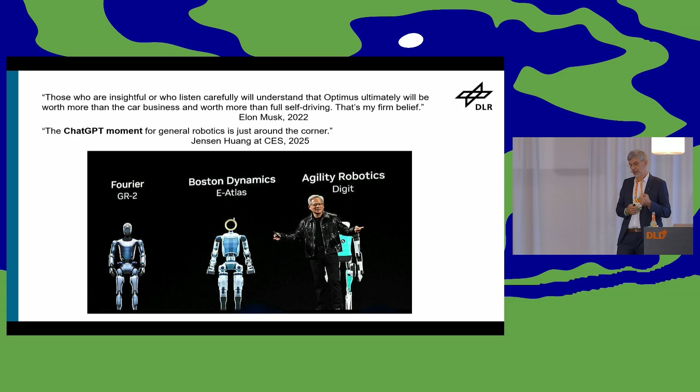Now, if you want this AI to go out in the real world, of course, we have autonomous driving, but if you want to do things a human can do, then you need even another leap step in robotics.

And there are plenty of companies coming up, and of course you might trust or not trust those studies, but there are crazy numbers around, which make investors and industry nervous, like saying in 2-3 years we will have manufacturing, then business, then family.

So everyone, instead of buying a second car, will buy a humanoid for at home, and then the numbers here are tremendous. These are thousands, so no, 10,000 units, huge numbers.

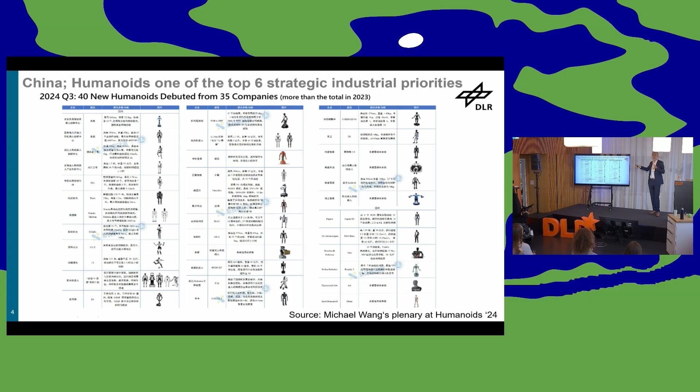And then also, after this start in the US, China responded with a huge program. They put, according to Süddeutsche Zeitung, about 140 billion into just humanoid robotics, with the consequence that you have more than 140 companies building humanoid robots with no application out there yet where they act in the factories.

So the question is, what about us? How do we respond in Europe? What do we do about it?

And one place where we are discussing those things is a network of excellence in robotics, which I have the honor to coordinate, and where we have all the major research centers, or most of the major research centers in Europe, which are strong in robotics.

And the question is, how can we respond with a good scientific excellence, maybe quite fragmented industrial landscape, to this challenge? And the main topic we wanted to focus on was transferability, because looking at my colleagues, for example, Tamim Asfour in Karlsruhe, or colleagues at TUM.

We all have our humanoid robots on wheels, on legs, maybe other types of mobile robots, and we all focus on the same things: perception, human-robot interaction, motion planning, skillful motion, and so on, and we repeat and reinvent the wheel again and again. So we said, what about if we can use the AI tools and the advancements in robotics...

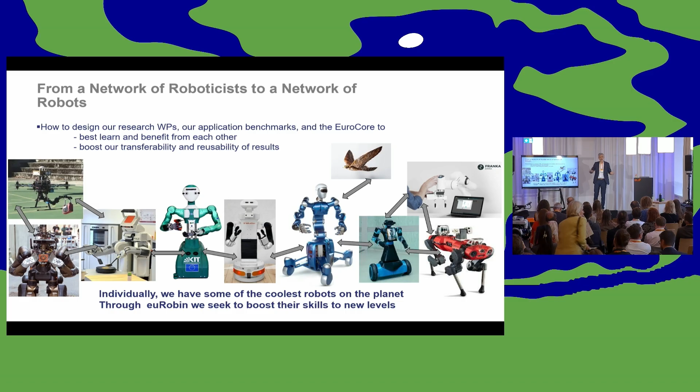...such that if our Justin learns a skill, for example, to unload your dishwasher, you can upload it in the cloud, and the next day another robot can do the same thing, even though it has a different morphology, not even humanoid, but maybe on a Segway, or just having one arm. So this is what we are looking at.

Somebody talked about hackathons just before lunch. This is what we are doing. At least once a year, we get together with 200 people, put 30 robots together, and try to solve things in competitions, but what we call cooperative competitions.

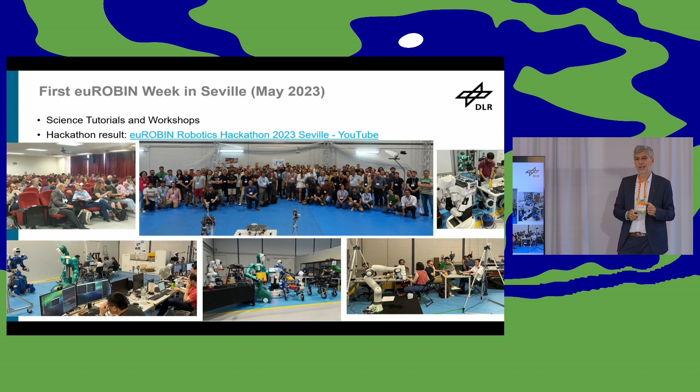So you earn points if you solve a task. You earn 10 times as many points if you solve a task using software modules from somebody else, just to foster standardization, integration, and so on.

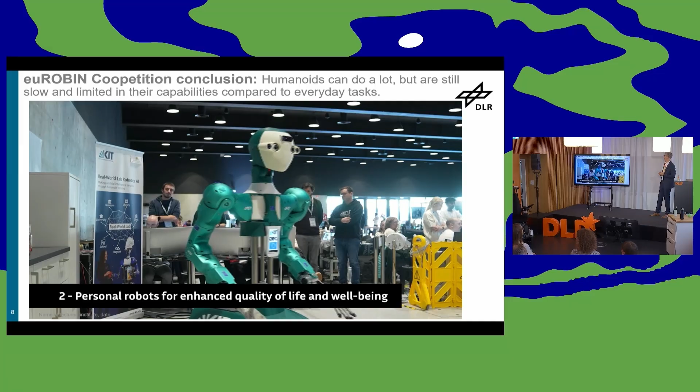And here are some images from the coopetition we had in Nancy after the Humanoids conference. And this was our Justin robot. This is KIT from Karlsruhe. We had one league for home robotics, so unloading the dishwasher, going and bringing things to the fridge, interacting with humans.

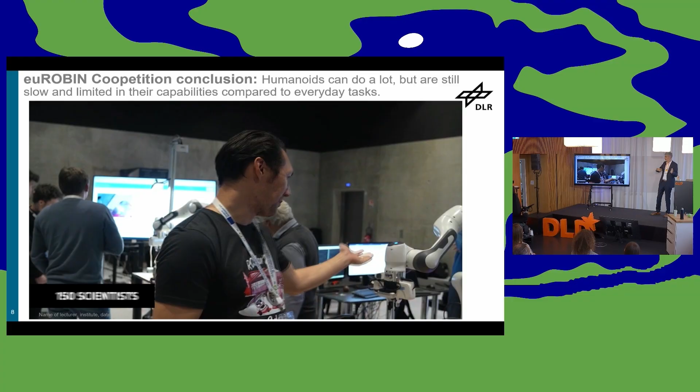Then we had the industrial part with a task board coordinated by our colleagues at TUM, where you have a standardized benchmark with Internet of Things devices.

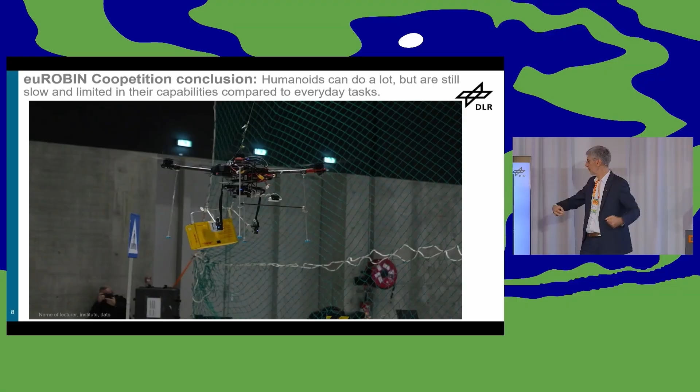These are the colleagues from ETH Zurich. They have a quadruped with wheels, so it doesn't need to be humanoid. Here you have a drone which has arms, and they had a scenario of last mile delivery.

And here you have a centaur, legs and wheels and 2 arms, and they are bringing the parcel to your home. So these were the 3 tasks: home environment from INRIA France, industrial, and last mile delivery.

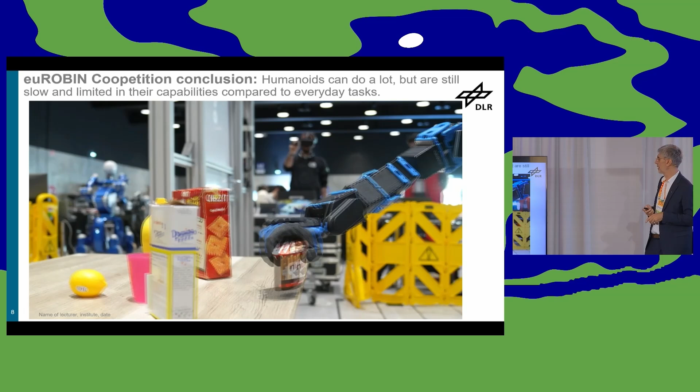This is a group from Italy, which had a telemanipulated robot. So it was big fun, and we also saw the chances, but also limitations of robotics.

Now, I will try to go through some aspects, to say what are the challenges and where are we.

Building humanoid robots, Japanese were among the first. This Ashimo in 2000 was the first to be recognized by the public. There were developments in the 90s as well. Now we have plenty of them.

And of course, there's the question, what kind of actuators? How can you do it more efficient, faster? There's big development also in actuation, in power electronics, also with electric motors for electric cars, for wind turbines, for so many new applications. So there's a shift in power density of actuation.

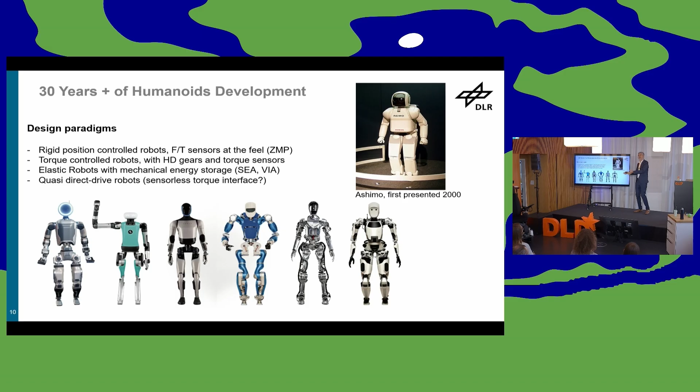Building such systems, there's still a competition: how does the ideal humanoid look like? Just to answer your question, no, you don't need wheels all the time. If your factory is flat, you don't need legs, right? You can use wheels. But the point is, if a newspaper wants to speak about AI, they would put such a robot on their cover, because everyone is then sure this robot is intelligent, just because it looks like a human. While if you put a centaur, you don't know exactly how smart a centaur is.

So something has also to do with communication, and with the fact that it's easier to get investment for a humanoid than for a robot with 8 legs and 7 arms, for example.

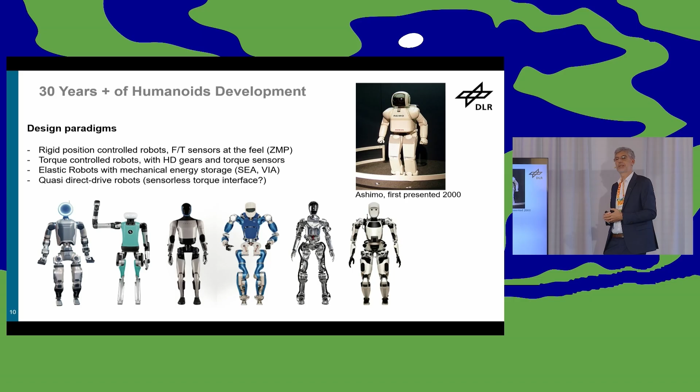But it's also related to the fact that our homes are all designed for us, for our hands, for our bodies. So if you have robots to do whatever you do at home, probably it needs to look a little bit similar, to climb your stairs, to grasp all the objects which you have in your home. So it's not the ideal solution, but it's something which is good in human environments.

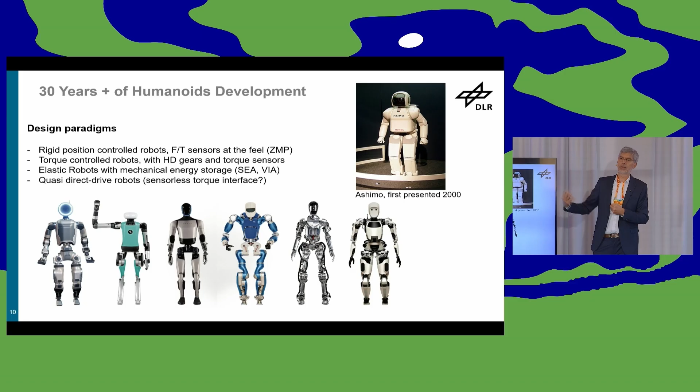And interpretability is another aspect. If you watch a humanoid moving in a human kind of way, you kind of have an expectation and a prediction what it could do. The technology has been around for a long time. And when people talk about having them in homes in 2-3 years, I'm a bit skeptical about that, just because I did my whole career developing cobots.

And we had a first prototype after about 8 years, in 2003, and then we licensed it to KUKA, then Franka, Emika, Agile Robot - a lot of companies bring those robots to the market. But from the start of the development, from the first working prototype in 2003, it was like 8 to 9 years until the first companies had the products.

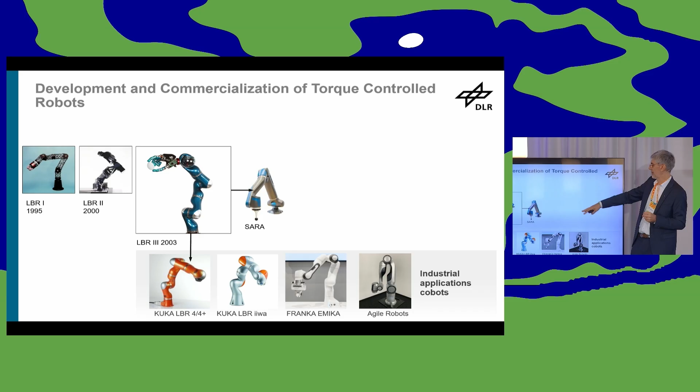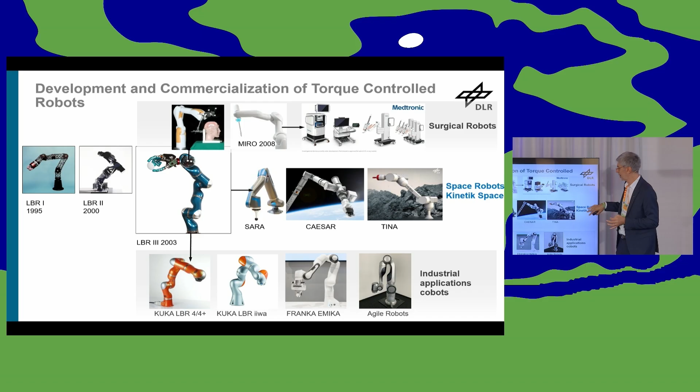We licensed this to Medtronic, to surgical robotics - we heard about that. So a big industry emerging, but it's deep tech, and it takes 10, 15 years at least. And now we are doing it also for space - space is even slower. But then you can use the actuators and build humanoids like Toro, Justin.

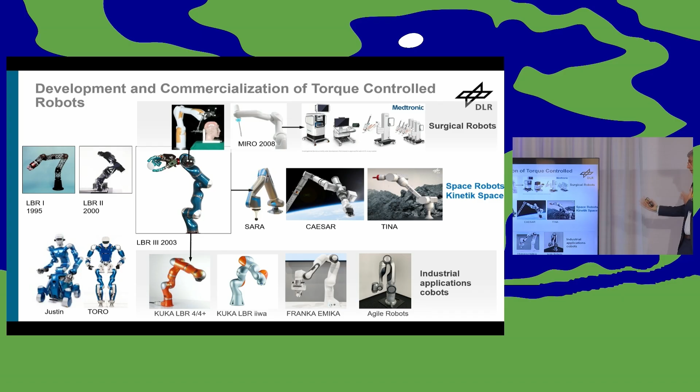And of course, now things change. We never had that amount of investment, of talent in robotics. Companies had maybe a few thousand employees. Now the big tech companies go into the game. So maybe this will also accelerate the entire development.

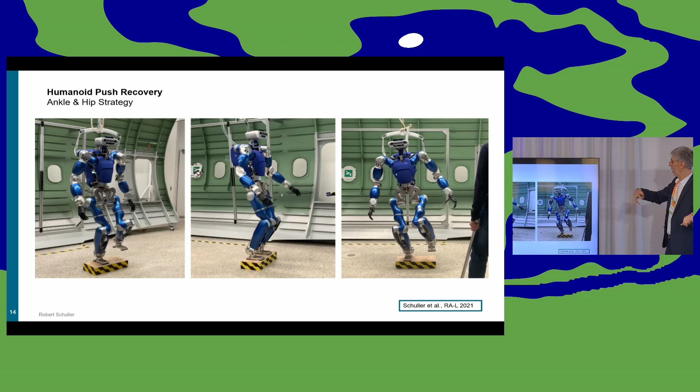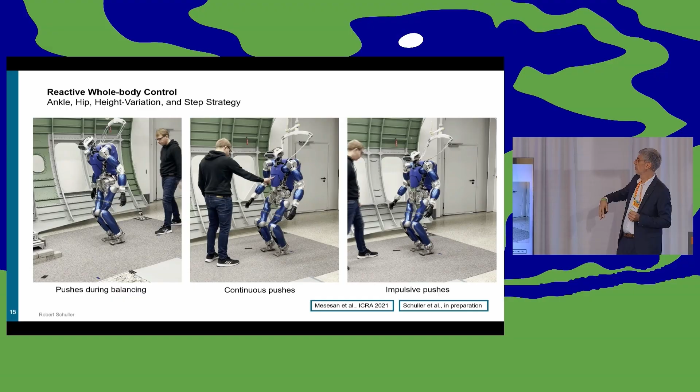When you see those videos, you see walking, balancing, doing some acrobatics. This is still, I think, to a large extent solved. So robots can react in a pretty human-like way, either by machine learning or by other model-based controllers. We have also robots which can interact with humans, which are safe for interacting with humans, although they have pretty high power density. So I think these things are well solved.

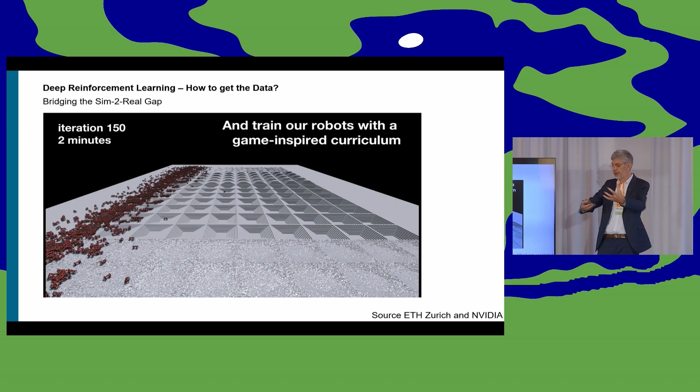And the big game changer in the last years came from ETH Zurich, NVIDIA, where you train massively in simulation with GPUs in parallel. Because the point is, in contrast to speech translation, to language recognition, we don't have the physical data in the internet. You have a lot of labeled text in the internet to train your large language models, but how do you get the physical motions, the connection between the camera input and the motion of the robot? You don't have those data on the internet.

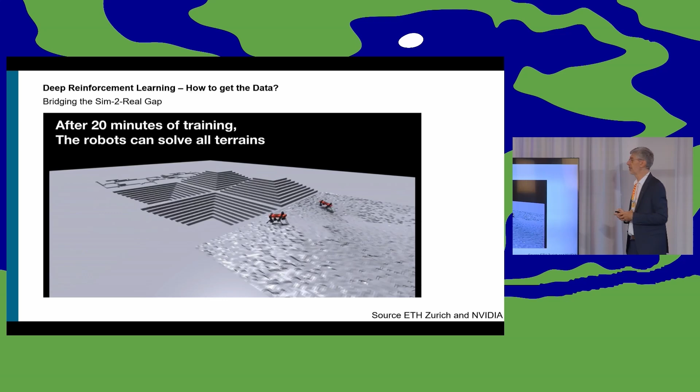So you could do simulation like this, but there's still what is called the sim-to-real gap, which is still not a completely solved challenge. Does your simulation match well enough the reality? It works sometimes not so well. But this is where we are, and most of the fancy videos you see also from Japanese or Chinese robots are made using this kind of reinforcement learning tools from NVIDIA.

But then what came additionally to hardware and control are the entire developments of AI in its different kinds, right?

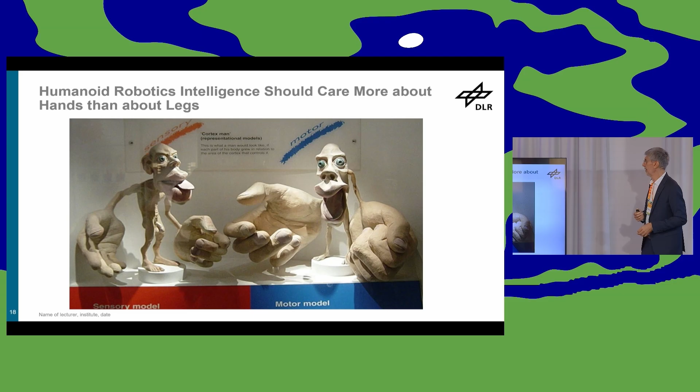When people talk about humanoids, many focus on the legs, but many forget that hands are even more important. This homunculus is just an illustration of the proportion of the brain used for different body parts, scaled up if a big part of your brain is addressing those parts, for sensors and actuation. What you see is that most of your brain deals with the hands, both for perception and action, then with the lips, with speech and so on. Feet and legs are not even that great, which shows that manipulation, handling all those objects, is still a largely unsolved task in robotics, and we are just getting better and better on that aspect.

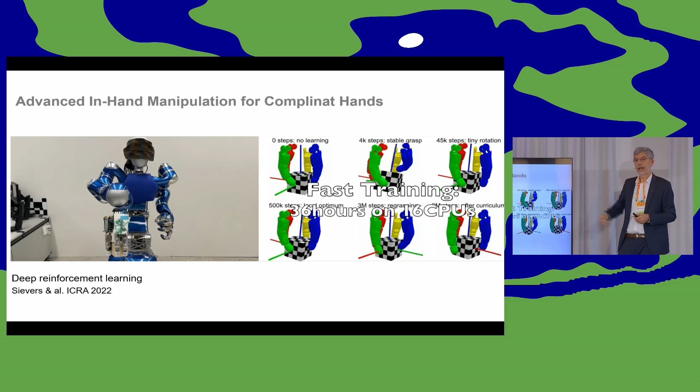And again, here you can use reinforcement learning, sim to real. Even manipulating a cube or grasping different objects needs millions of training cycles in simulation. And then you can manipulate certain objects. So there's continuous progress. When are we there that you can manipulate all your objects in your home? I don't know yet.

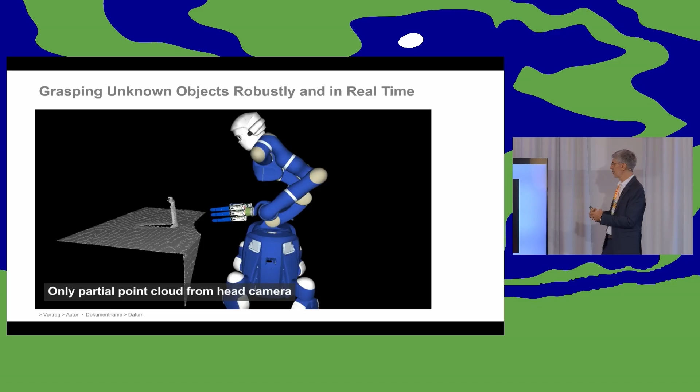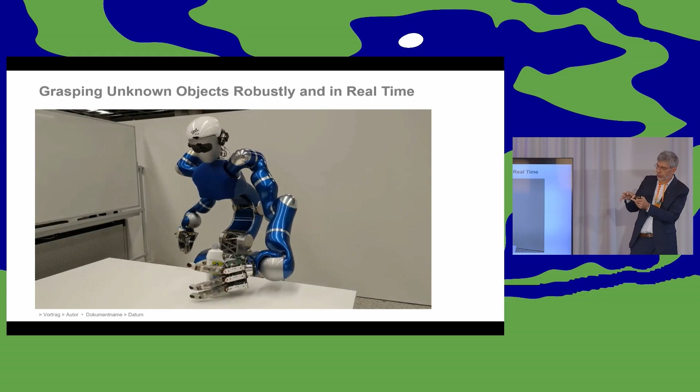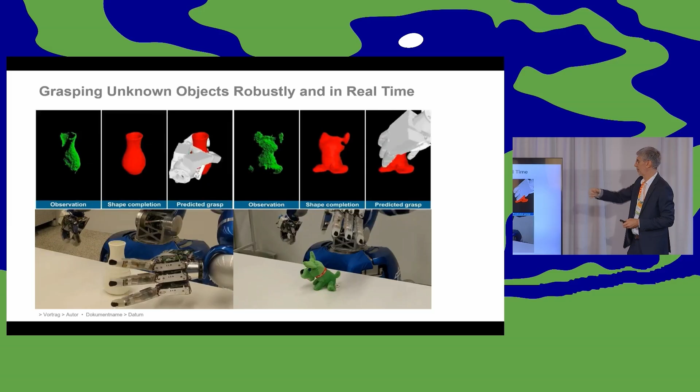The other aspect, some example of the challenges we have and where you use AI: you have a camera, and you recognize, of course, only the front of the object. As a human, you know how the object most likely looks behind. So you have an AI part which does the shape completion and then generates the grasp, telling you where to put each finger, how to bend each joint, such that you grasp the object. And then you can put arbitrary objects on the table, and within 1 second, this AI pipeline generates a grasp such that you can pick objects.

How to train vision: meanwhile, we have simulation tools where you can generate synthetic visual data to train your vision algorithms. So data generation is one of the big challenges.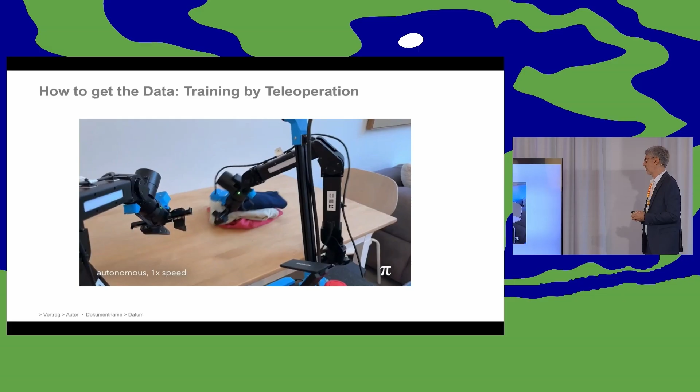This is an example of a company from California coming out of Stanford, and they are folding laundry. It's an impressive demonstration. Mainly, they do teleoperations, so they have lots of people. Also, many other companies use hundreds of people to teleoperate robots, and they record that data, then use it for training. So data are still very, very expensive, and I think solving that, there are still unsolved methodical issues in order to scale really at large.

Some are very optimistic and say in 2 years it will be solved. Some say it will take longer.

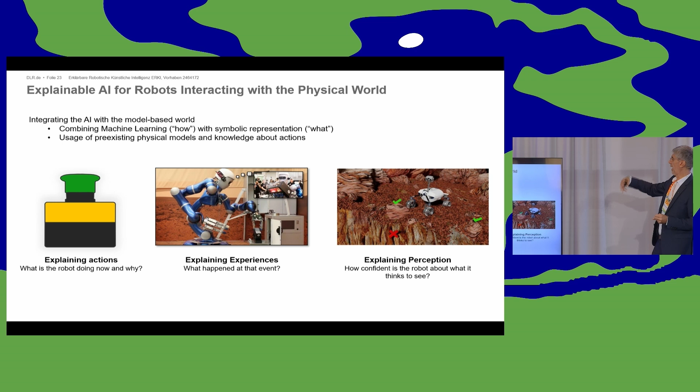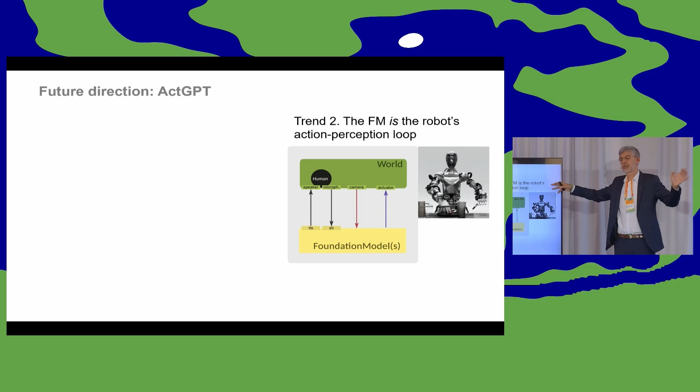Now we have foundation models which help in explainability, in planning, in several aspects. There's a big discussion going around about whether you will have one big foundation model where you put the camera input data of your robot, and the foundation model gives you motions for each of the 40 joints, or whether it's rather like in your brain, where you have a cognitive architecture for perception, for planning, for cognition, and so on. So research is going on. Humans, it's in our brain, it's not an amorphic structure, but we know where perception is, where the world model is, where planning is, where reasoning is, and so on.

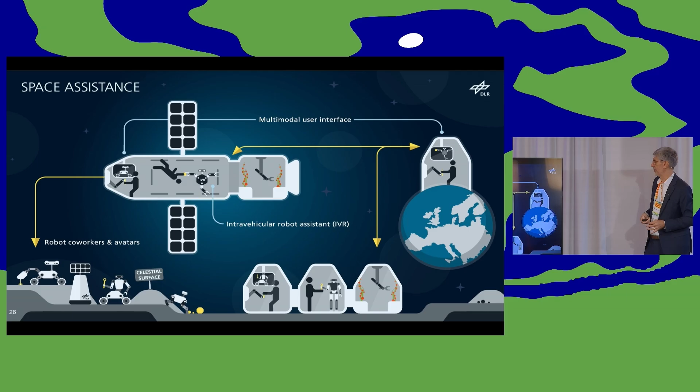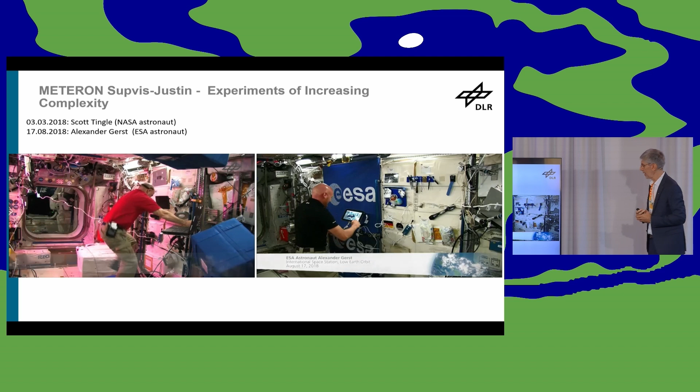Okay, now some applications. I'm from the German Aerospace Center, so we are developing robots to go to foreign planets and have done experiments with astronauts over several years to train them and to learn how they would operate robots on a planet. Imagine this is Alexander Gerst, and the other one is a NASA astronaut, and they are operating several robots in our institute.

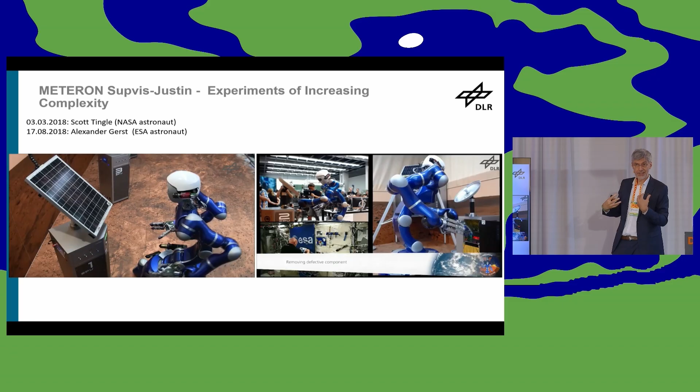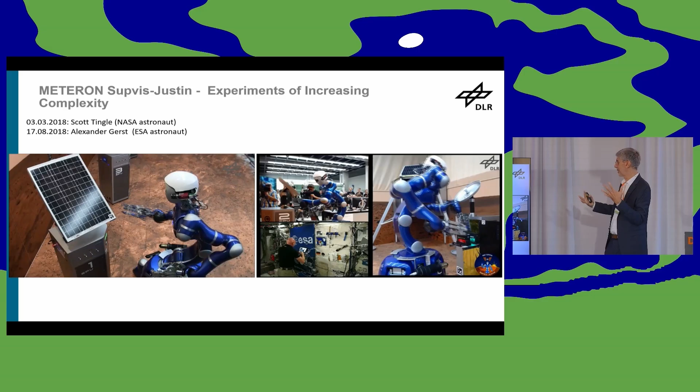They look through the eyes of the robot, can also go and operate them as avatars and feel the forces when they interact with the environment, but they can also use AI skills and just tell the robot to go and pick, I don't know, this electronic box. And they face challenges like smoke coming out, and they need to replace something from the electronic cabinet and so on.

The goal is at the end to have a humanoid on Moon and on Mars. We know Elon Musk wants to have one. We still hope in Europe to maybe bring the first humanoid or legged robot to the Moon. There's a big discussion going on. The decision will be made in November by the European Space Agency.

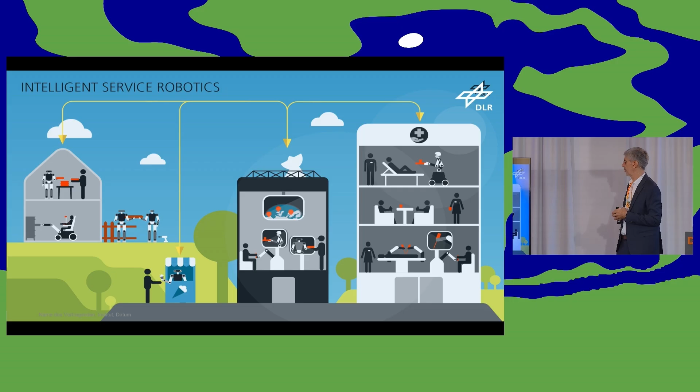And then the topic which makes also the connection to the next talk is humanoids in everyday life, addressing the challenge of demographic change, both in hospitals, in homes, in public spaces, and so on. I mean, this kind of plots probably all of you know.

Those people will retire in the next 15 years, and other people will come into the workforce. In Germany, it's a delta of 4 to 5 million. In Europe, it's 20 million in 10 years that we will lose from the working market.

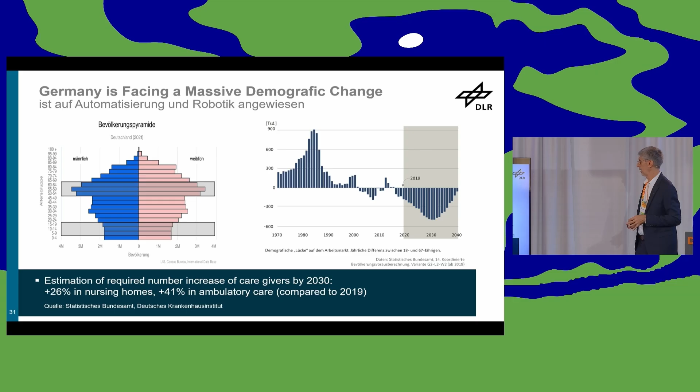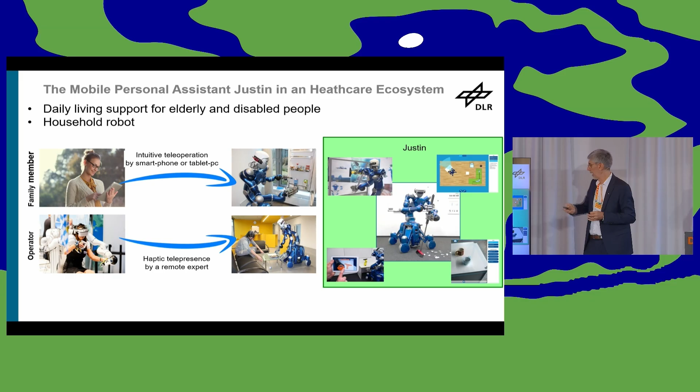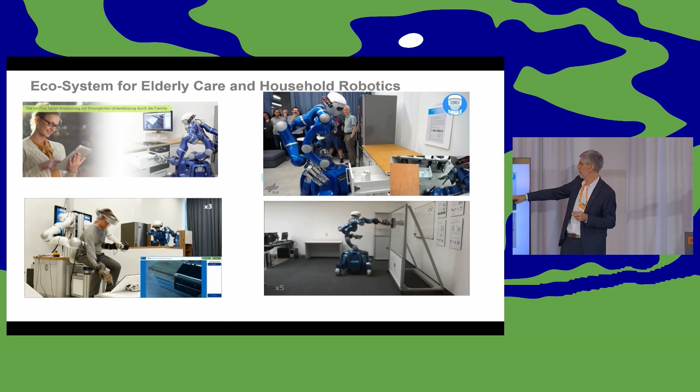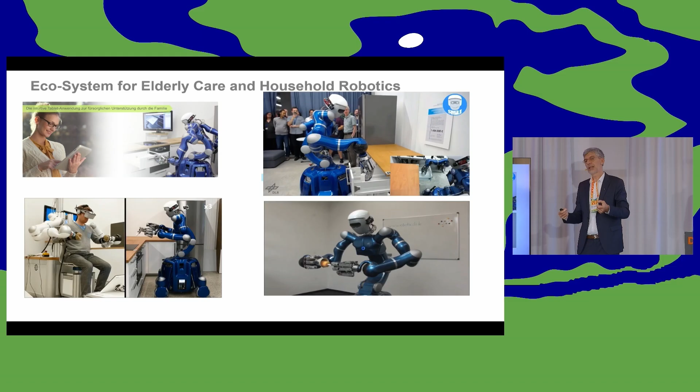So having robots to help people stay longer at home, not needing care, but being independent, either as humanoids—actually they don't need to be always humanoids. And of course, humanoids you can operate, but AI is not good enough yet that they would do the job independently. What we do is we have a call center with somebody who can log in as a teleoperator, and if some problems occur, they can teleoperate the robot. Then you can record those data, and based on those data, you can improve the skills of the robot. That's how the market will scale and grow, right?

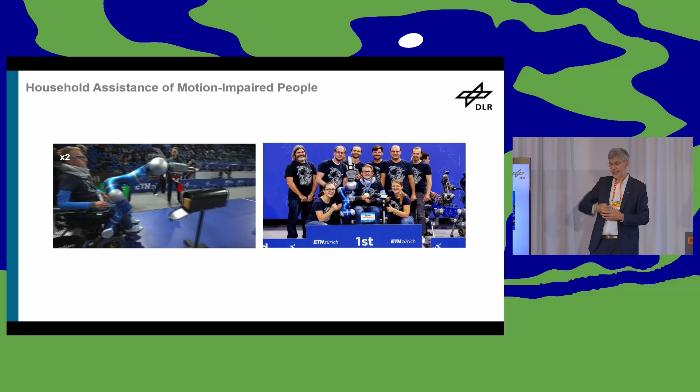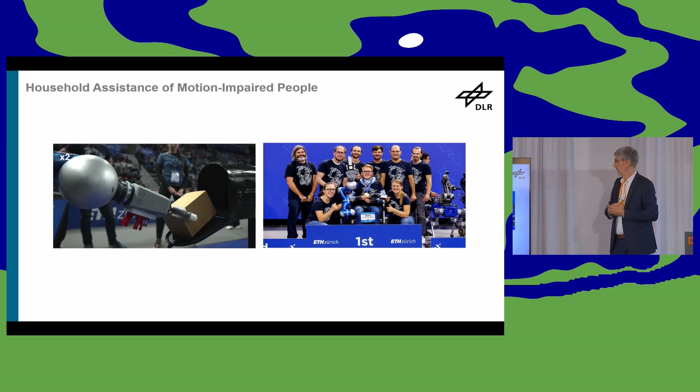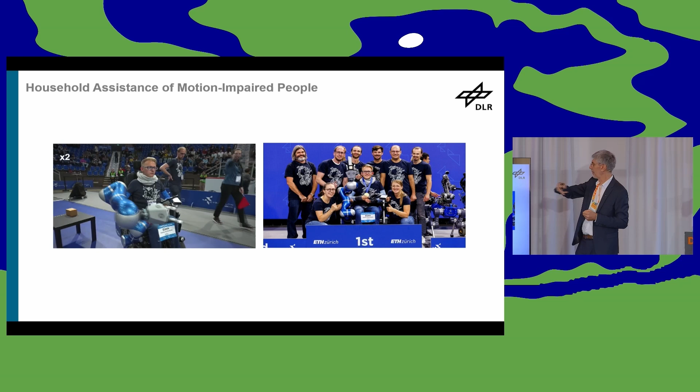But it's not just the humanoid helping—and this is Annette Hagengruber and Jörn Vogel who will present our robot—you have also things like a robot on a wheelchair helping locked-in patients like Stephen Hawking, for example, with AI skills. This is our team participating in a competition at ETH Zurich, a kind of Olympic Games for people with disabilities. We got the first prize there, and this motivated our team to start up a company based on that. And this is only possible because people are fully in the driving seat—they decide what the robot should do, but AI helps them accomplish the tasks. This can be in home, in hospitals, and so on, with a call center.

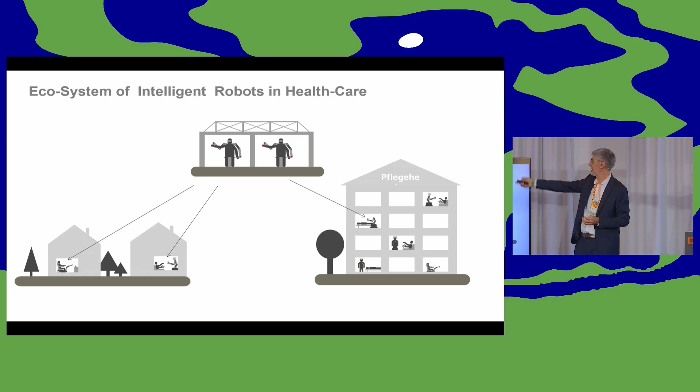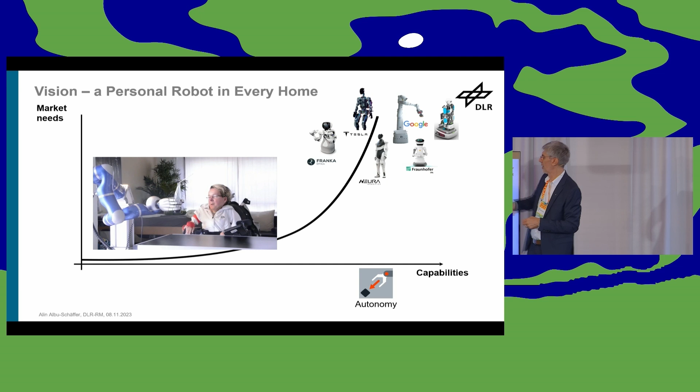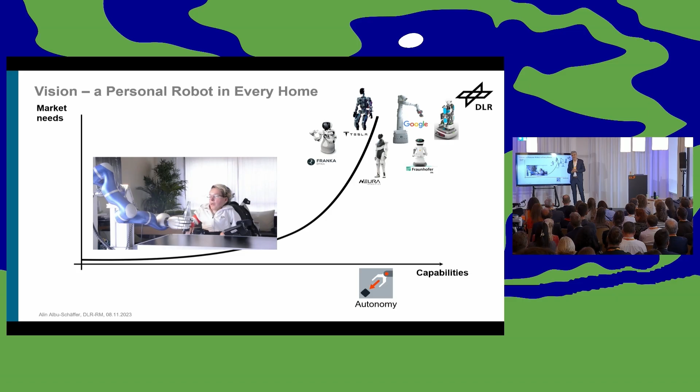So the big question is, I know very well how to address the market for 100 million robots, but how do you sell your first 1,000 robots, right? It's difficult to enter this exponential curve and scaling. That's why we think maybe not the perfect humanoid, which is maybe 10, 15 years away, but some more simple and easier to achieve goals can be the solution, where you start more with teleoperation, start generating data, and based on those data, you improve your quality of the AI and improve your services up to the point that you can provide services to the entire community.

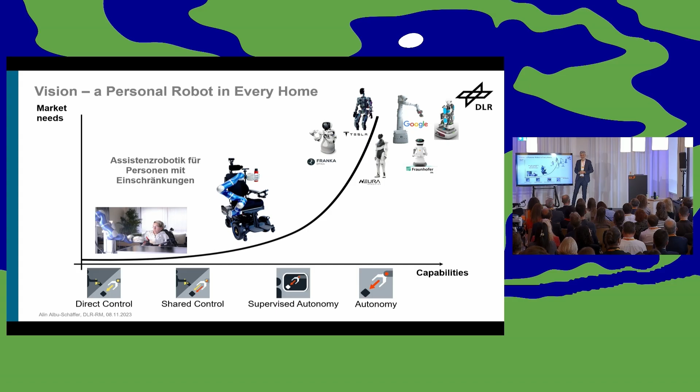And this is actually the direct transfer to Annette, who will take over and present you the wheelchair. From my side, thank you for your attention.

So thanks to Alin, we could already see some research that we are doing at German Aerospace Center on assistive robotics. And we're very proud that today we can present you our new prototype for our planned spin-off, Enabling Robotics, where we want to empower people for more independent living.

But before we go into details, let's take a step back and think of essential tasks that we all do every day: drinking a glass of water or eating. We all do that automatically, we don't even think about it. But think about people having an accident or an injury who need help to do so. They sometimes need 24 hours of assistance to do all tasks of daily living. And now imagine further, there is no one who can help them doing these tasks. It's not a secret that we are running into a care crisis. In 2049, it's expected that we will be missing up to 690,000 caregivers alone in Germany.

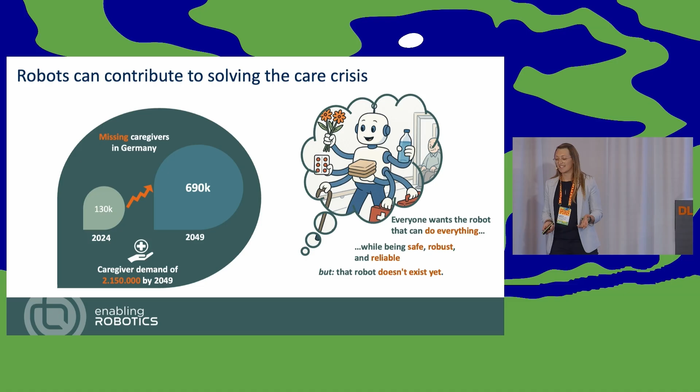Technologies like robotics can contribute to solving that problem. But what we all wish for is, at some point, a robot that can do everything for us—helping us, supporting us with all tasks—while being very safe, robust, and reliable, which is necessary in an unstructured and dynamic environment. But right now, such a robot does not exist yet.

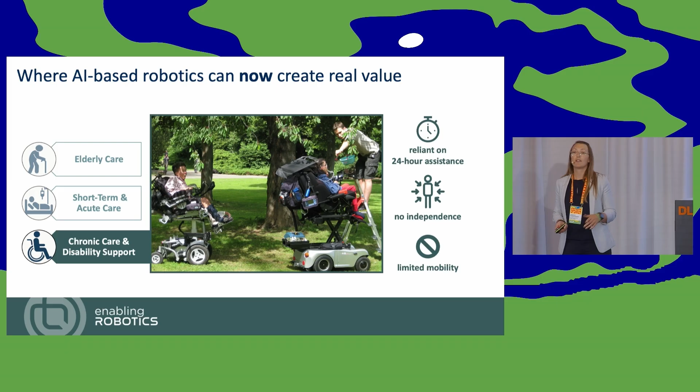And that's why, addressing a group of people where I see robotics can already nowadays create real value—these are people with motor impairments. These people are very often fully engaged in life and want to be active. With the help of their wheelchair, they are mobile, but they're still not independent. As soon as they come to a door or an elevator, they cannot press the button or handle the door. And this is where our system comes in.

Our solution: an AI-driven manipulation for empowering independent living. And here I want to switch over to my colleague Jörn Vogel, who will show and present our system in detail. So welcome from my side, and I'm very happy—can anyone hear me?

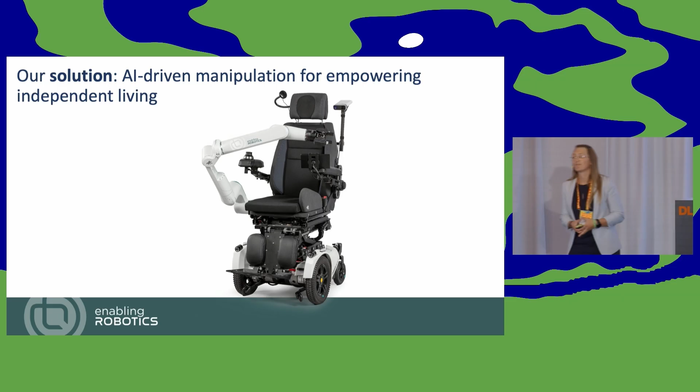Yeah, very happy to present you our robotic system, Maya. You can see that we built a robot arm specifically designed for this application, so it is safe to interact with. It can be controlled with the user interface of the wheelchair. And if you want to drive the wheelchair, you can stow it away so that it doesn't obstruct you while driving.

We also have a camera on board that detects the scene in front of the robot to help with interaction with objects. And we have a tablet here which gives information to the user about what the robot can support with. I will quickly demonstrate this now.

As said, I can decide whether I want to drive the wheelchair or operate the arm, and use the same input device to do this. All I have to do is approach the environment or the objects I want to interact with, unfold the arm from the parking position, and from here I can use the same interface I used for the wheelchair to operate the arm and move it in space.

The camera now sees the objects in front of me, detects them, and allows me to interact with them. An interaction I can start by simply approaching the object with the arm. So I move towards this bottle.

It's similar to a lane-keeping assistant in a car, where I get guided to get the bottle between the fingers, but I can still have some control on how the task is performed. You can see how the gripper is always pointing towards the bottle, because I can decide where I want to pick it from, and just move closer to finally execute the grasp.

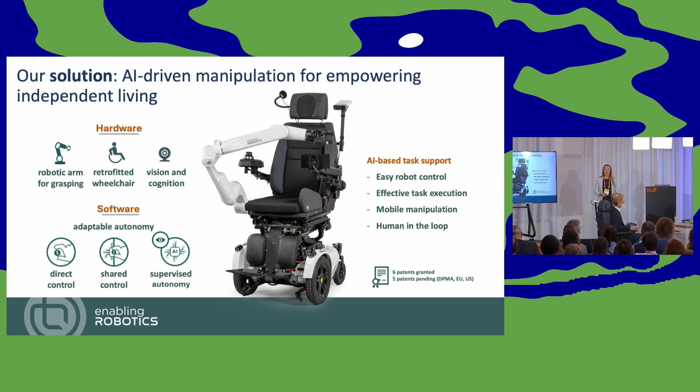So what are the benefits? For the user, it's somehow quite clear: they can have more independence in their life. And what is very special, they can be by themselves again. People can close the door and be really alone. This is sometimes something very special for these people.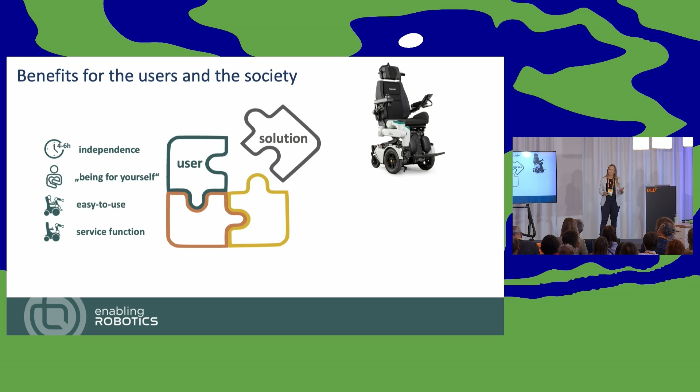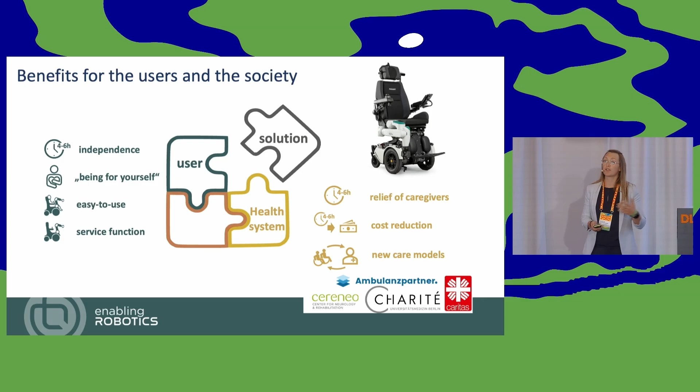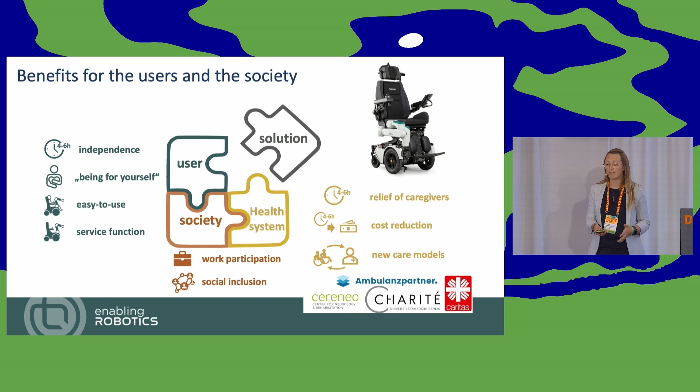But we're also in contact with different partners from health insurances and the health system market to bring benefits to both sides, a win-win situation, for example in how to bring such technologies to market and create new care models which are not possible without these technologies. And at the end, there is a benefit for all of us, having people we can better include in social life and who can stay longer and work.

So on one side, with our solution, we can empower people with motor impairments to physically interact again with their environment. And on the other side, we have the possibility to bring autonomous robots into households, gathering real-world data that no one else had.

Exactly what Aline said before, really seeing that gap, how to gather this data. And this data, together with our human-in-the-loop approach, lets us boost the robot's capabilities and increase autonomy continuously. So it's a win-win situation for the user and the robot.

As we saw directly, if there is something not really working, you don't need 100% reliability. The human can help the robot, and the robot supports the human. So by increasing the capabilities, the user also gets a better system, and more autonomy gets in.

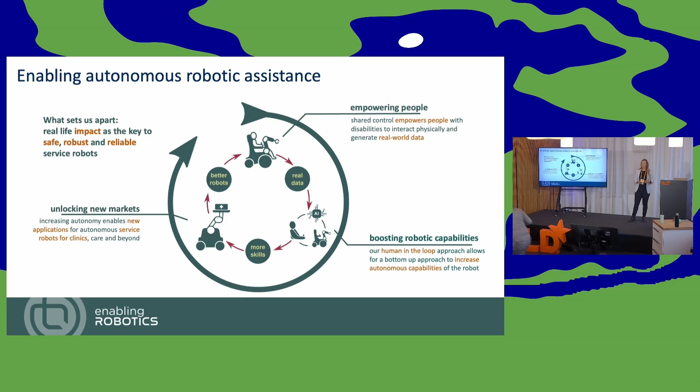And at the end, this unlocks new markets. With increasing autonomy, new applications are possible, and with this we can go into new markets for autonomous service robots for clinics, care, and even beyond. And this brings us back to the care crisis, where we can directly address this with this system.

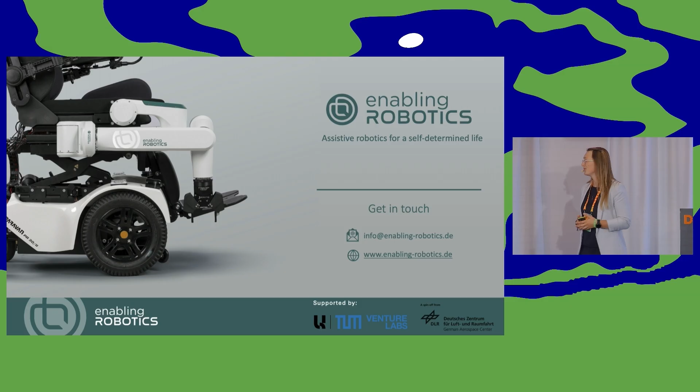In our founding team, we have a lot of knowledge over the years in assistive robotics, healthcare, and AI. And together we want to found Enabling Robotics, and we are happy if you get in contact with us. We are also later downstairs in the networking area, and I think there will be some questions later too.

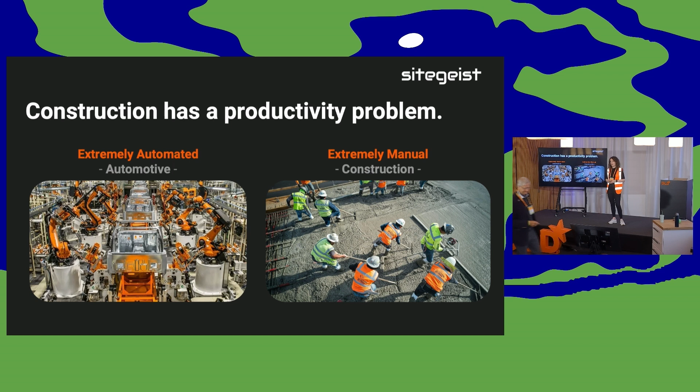Hello. So today, construction is one of the most manual and inefficient industries in the world, while in other sectors, for example in factory halls, productivity increased by over 800% over the last couple of years. In construction, productivity actually declined because it still heavily relies on manual and physical labor.

Now imagine a future of construction where no human worker needs to bend over these manual tools anymore, but instead intelligent machines are performing the heavy lifting on construction sites, and the humans just stand beside and oversee the quality of their work. This is not science fiction, it is what we build with Sitegeist Robotics right now.

Now, let me tell you, it's not that easy to automate construction. Construction sites are dirty and very chaotic. They are changing every day, and no construction site is like the other. So you cannot simply drop normal machines onto these construction sites. Instead, we need a new kind of robotic system, and we are building the first of its kind.

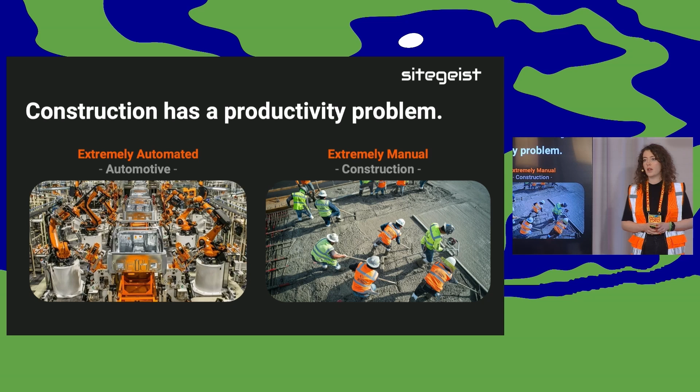We are building a modular and intelligent construction robot. Intelligent in that it can understand and observe its environment and safely work beside human construction workers. And modular in that it can easily be reconfigured to the specifics of each construction site.

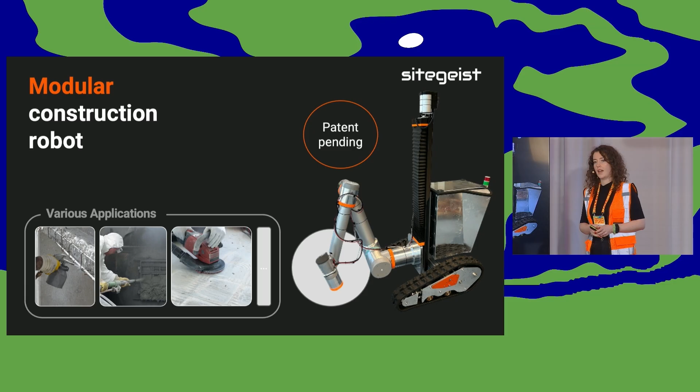Our construction robot can perform multiple construction tasks simply by switching the tool the robot holds in its hand, as a human construction worker would. And we are starting with one of the toughest jobs on construction sites that you can imagine, and this is concrete removal.

So when construction workers are removing concrete, they spray high pressure water against the concrete wall to remove it. It's such physically draining work, with 30 kilograms pushing against your shoulders while performing this task, so the construction workers need to switch every 30 minutes.

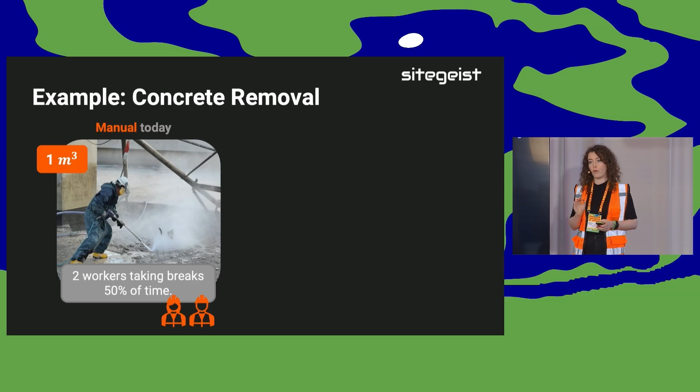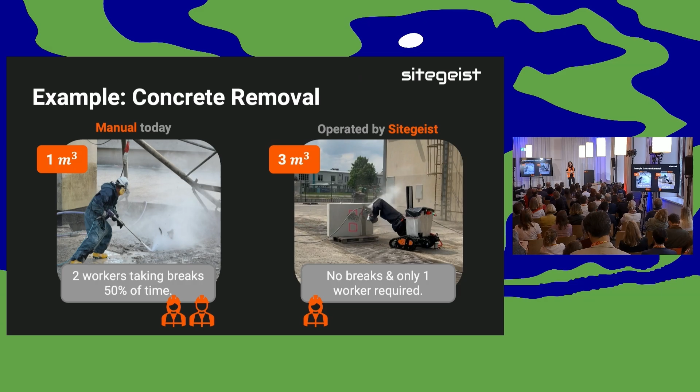And although 2 construction workers are performing the task, humans can only remove 1 cubic meter per day. Our construction robot can remove 3 cubic meters per day. It does not need any breaks, and just one human construction worker is needed to supervise its work. So it's really a massive productivity gain for our customers, and real cost savings here.

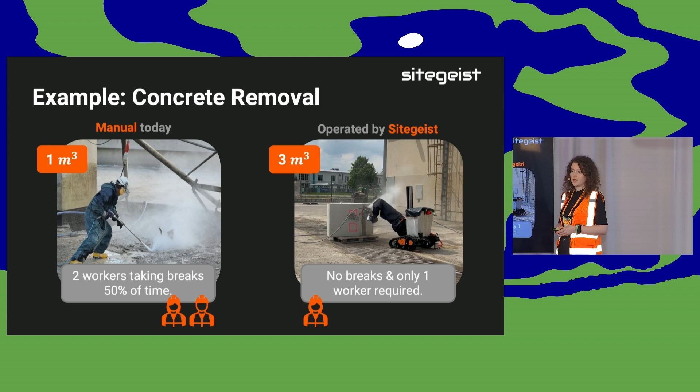Concrete removal is just the first task that we are automating. We are already implementing other tasks like drilling and plastering. So while over time we increase the tool or construction task portfolio, having our robots on site also lets us collect very valuable data, which allows us not only to increase the level of autonomy of our robots on construction sites, but also offer new digital services like automated invoicing on construction sites.

Ultimately, the ecosystem that we build will set and define the new zeitgeist on construction sites.

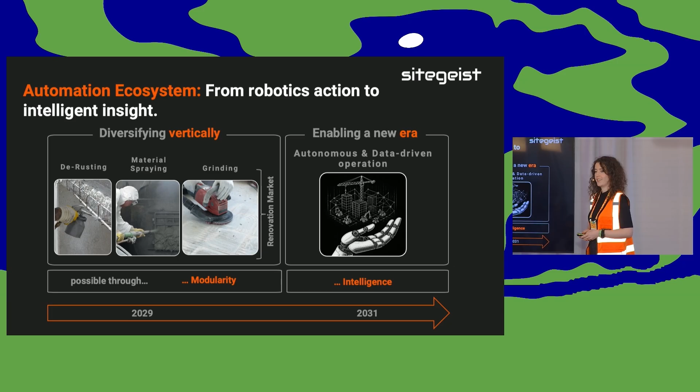We are supported in this big vision by a governmental fund of 1.2 million from the Federal Ministry of Economics, and by various initiatives from the Munich ecosystem. We are also mentored by experienced founders from the Munich ecosystem, for example the founders of Konux and RockPro, but also on an international level, for example Michael Baum from the US, the founder of Splunk.

We are a co-founder team of 4 co-founders, Julian, Klaus, Lena, and I, and we bring deep expertise in computer science, robotics, engineering, and business.

So I believe we need to rethink how we build, and with Sitegeist, it's not only about building robots. We are building a future where no human construction worker is worn out anymore, but instead they are supported, and where construction companies are not bottlenecked by labor shortage, but instead they are getting more productive, and where we as a society can finally tackle the massive renovation backlog that we are facing.

So that's the future I believe in, and we would love to build it with your support. Thank you.